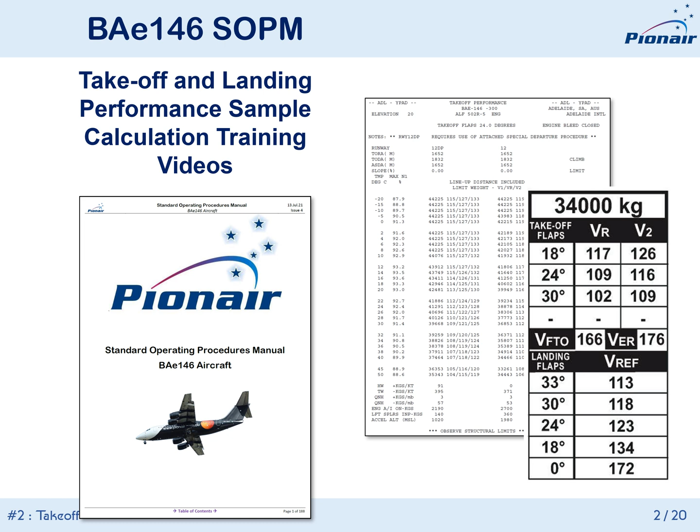By way of preparation, we suggest you review the published material so that you're at least familiar with the process. While some of the procedure relies on documents you're familiar with, such as runway analysis charts and speed cards, the new engine thrust tables card is a new document that will find its way onto our flight decks, along with a completely revised takeoff and landing data card format that we'll see when the new SOPM goes live.

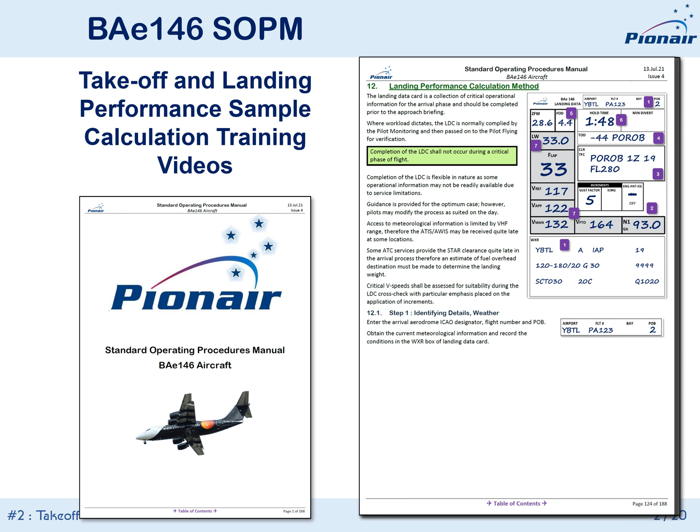Meanwhile, the process for calculating the takeoff data and the landing data is also comprehensively covered in the SOPM. Your best training experience is if you work alongside these videos, developing your own copy of the solution you see developing on the screen in front of you.

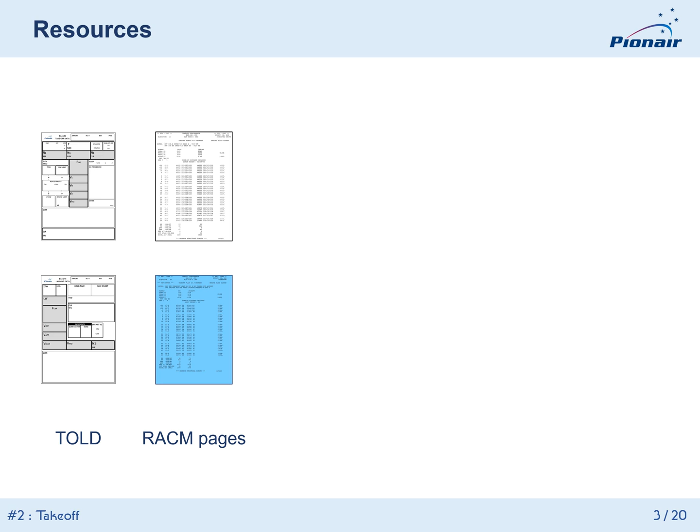To do this, you're going to need one of the new format takeoff and landing data cards, access to the Runway Analysis Chart Manual, or RACM as we'll be calling it from here on in, the new engine thrust table card, a set of 146 speed cards, and also from the front of the RACM, the list of airports and noise abatement profiles. All of this material is accessible electronically inside Comply 365.

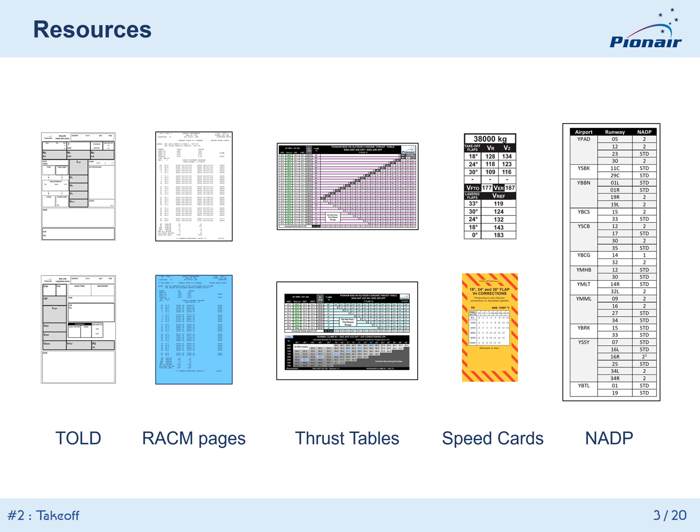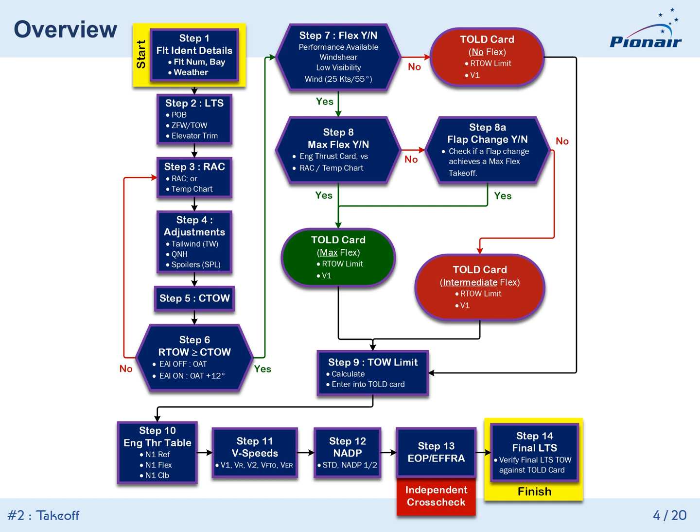Like anything colored purple in the SOPM, or in this case, purple edged boxes, if you click on the purple, your PDF reader will jump to that section of the SOPM and explain or provide a detail of what you've clicked on. At that point, your PDF reader will have a back button, which can then be used to take you back to where you last jumped from, which in this example would be this diagram in the SOPM. All right, let's move on to the example scenario.

Our second example is a departure from runway 29 centre in Bankstown, where the temperature is 8 degrees, the runway is wet, and it's raining. Pretty much screams engine anti-ice, doesn't it? The QNH is low, which is also not helping, and the takeoff weight is just under 35 tonnes. Also, we're in a 200 series aircraft. Let's go into it, shall we?

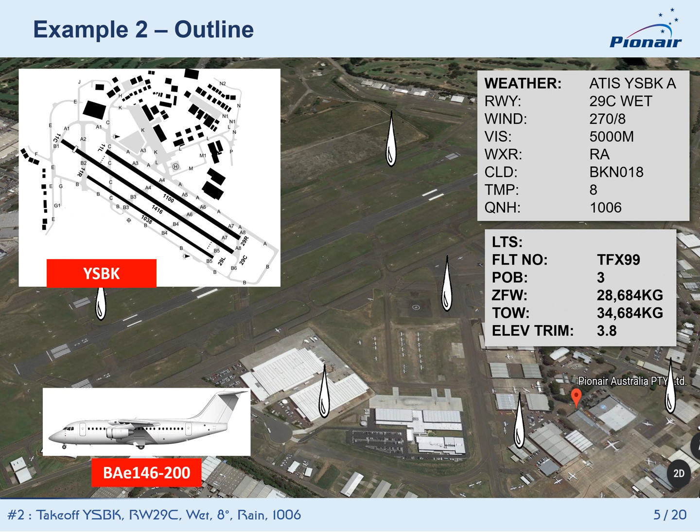Step 1 is the flight identifying details and the weather. So first of all, let's head to the top of the card with the airport and the flight number. If we had a bay, we'd stick that in there too. Moving on, let's put the pertinent weather from the ATIS into the weather box on the card. Based on the ATIS, we'll stick the runway in as 29 centre full length.

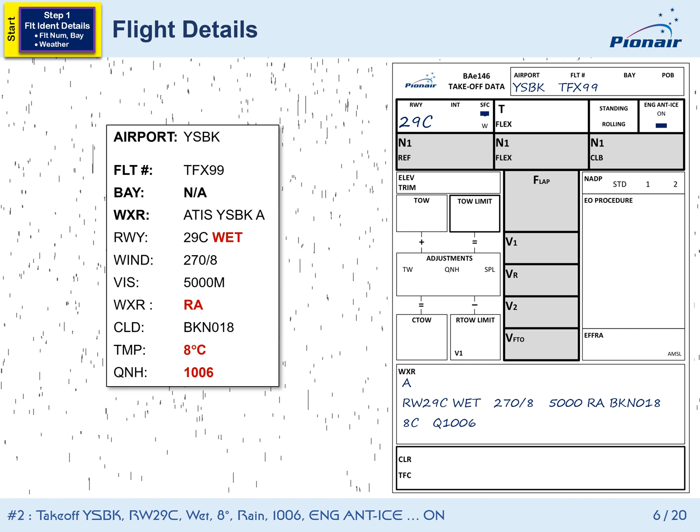We can also indicate that the runway is wet, which has been done here by crossing out dry, but of course you can use the method to circle wet if you want, just keep it consistent through the card. And at this point, we need to accept the inevitability of engine anti-ice on. Okay, so with step 1 complete, it's time to move on to step 2. Now we have a load and trim sheet.

The load and trim sheet comes with confirmation of the POB, so we can enter that in the identifying box at the top. Now we can take the takeoff weight from the LTS, round it up to the next 100 kilos, and enter that into the TOW box. We'll also take this opportunity to grab the zero fuel weight from the LTS and record it on the landing card for later, once again rounding up to the next 100 kilos.

Finally, the elevator trim can also be entered into the elevator trim box. Note that if we're in a -300, we just enter the final trim setting that we'll be checking with the before takeoff checklist, and we don't enter any indication of flap trim compensation that we would initially set during pre-flight. We'll keep the card simple. With step 2 complete, we're moving on to step 3, the RACM.

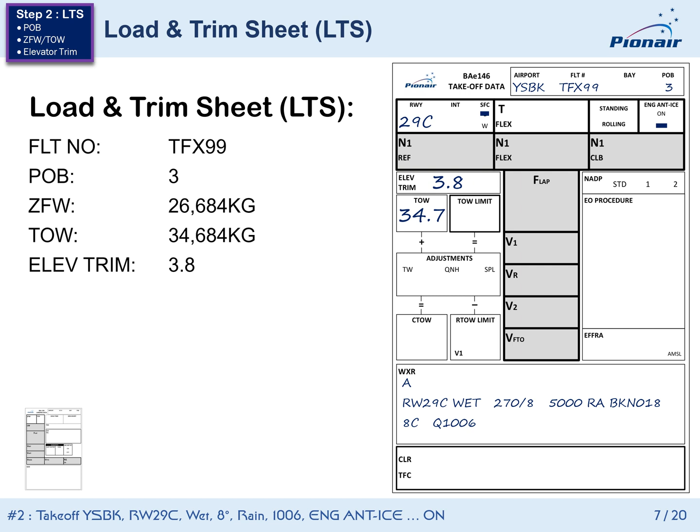Step 3 is the RACM. The first challenge is making sure we have the correct page. We need the correct book for the series of aircraft, remembering we're in a 200 today. We then need to find the airport and the runway, at which point we might need to go back and check there isn't a NOTAM watch chart that we should have gone to instead. But continuing on, the most obvious thing here is the light blue page, because we're operating off a wet runway, also indicated by the wet notation towards the top left-hand corner.

Meanwhile, we're in Bankstown, so the runway is shorter, and a wet runway is never good for stopping in an aeroplane without reverse thrust, so we're looking at flap 24 for our takeoff, while wondering in the back of our minds as to whether today is the day we use flap 30. The last factor to consider is whether we can use a straight-out engine departure and make the pilot flying's day, or should we be opting for a special departure procedure in order to optimize performance.

In this case, we're going for full-length runway 29 centre, no intersections, straight out on a wet chart, and no other aircraft taxiing in our way. Having chosen our RACM chart, we'll move on to step 4, looking at the weight adjustments.

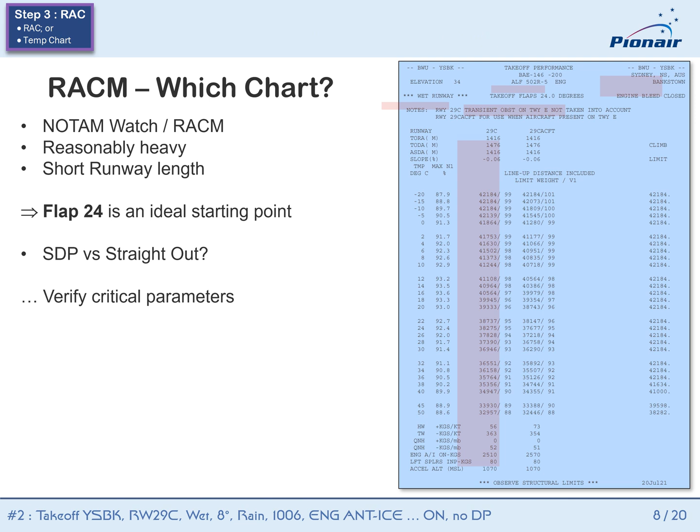Step 4 is calculating the performance adjustments we need to make for any tailwind, low QNH, or dispatch with defective lift spoilers. Don't forget that we never use the engine anti-ice adjustment in the RTOW manuals, as these are not valid when considering a flex calculation. Instead, we use the 12-degree method, which we'll get into later.

In this case, the only adjustment we need to consider is the low QNH. So let's indicate that on the card, in this case by crossing out tailwind and spoiler indications. So, onto the low QNH. With a correction factor of 52 kilos per millibar and 7 millibars to correct for, we end up with a 364 kilo adjustment, which we'll round up to 400.

As a weight penalty, we write that as a positive number because we're going to add it to our planned takeoff weight to produce a CTOW, which makes it easier to compare with the RTOW manual limit weights in step 6 and step 8. Let's write 0.4 in the adjustments box.

That's it. Remember that if you were really trying to optimize performance, not so much trying to get the best flex today, but trying to get the most payload off the runway in quite limiting conditions, you could use the headwind to account for better performance. We're done with step 4, on to step 5, where we calculate the CTOW using our new adjustment number.

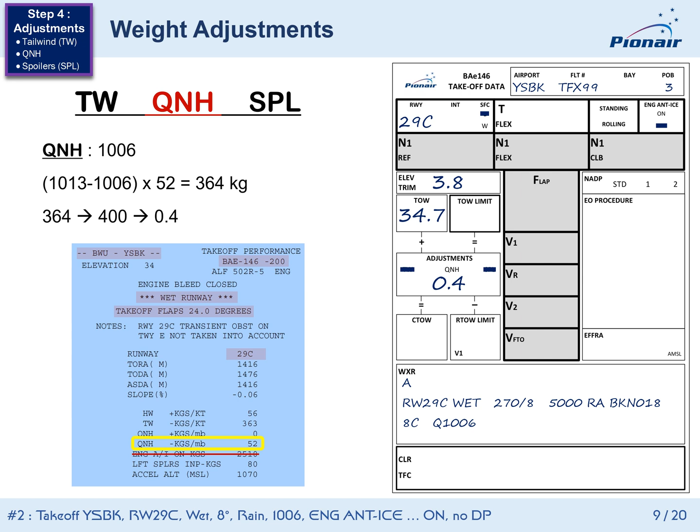Step 5 is the corrected takeoff weight, or CTOW. Once again, straight from the card, it's a simple addition to take the takeoff weight and add the adjustment. 34.7 tonnes and 400 kilos gives us a CTOW of 35.1, which we write on the card. And that's it for step 5. Let's move on to step 6.

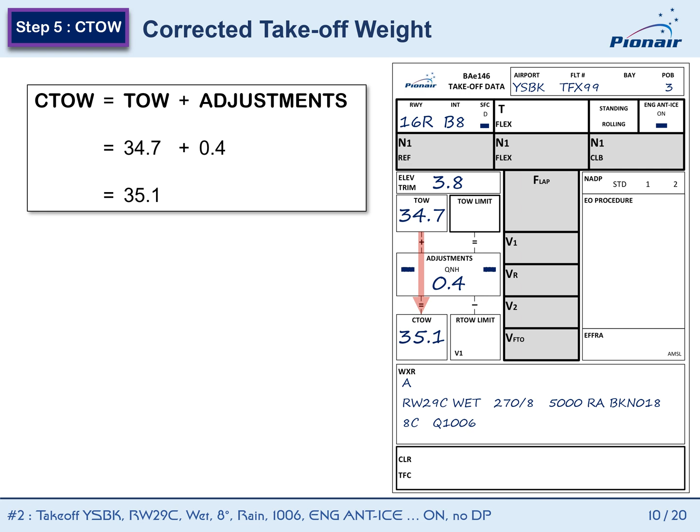Okay, step 6 is where we get busy. We are asked to check if the RTOW manual limit weight is greater or equal to the corrected takeoff weight we previously calculated. What we're actually asking is, can we take off under these conditions using full reference thrust? The first thing we need to do is actually determine what is the limiting RTOW from the manual.

Remember that in this case, we are engine anti-ice on, and we are not using the manual adjustment. So we need to use the FCOM 12-degree method. So in this case, we don't go into the chart at the ambient temperature of 8 degrees. Instead, we add 12 and we head in at 20 degrees. From 20 degrees, we head across to the right to our selected runway intersection column and look at the runway limit weight. In this case, it's 39,333 kilos.

As always, we need to continue across to the right to the climb limit weight, again at our augmented temperature of 20 degrees. Today, it's 42,184 kilos. As we complete our little table here, we can see that the RTOW limit is indeed greater than the corrected takeoff weight by just over 4 tonnes.

The upshot of all this is that we can actually take off today if we need to with full reference thrust. On the other hand, if we can't take off today using reference thrust, we need to go back to step 3 and reconsider some of the fundamental conditions. Can we get a longer or different runway, a different flap setting? Do we need to offload?

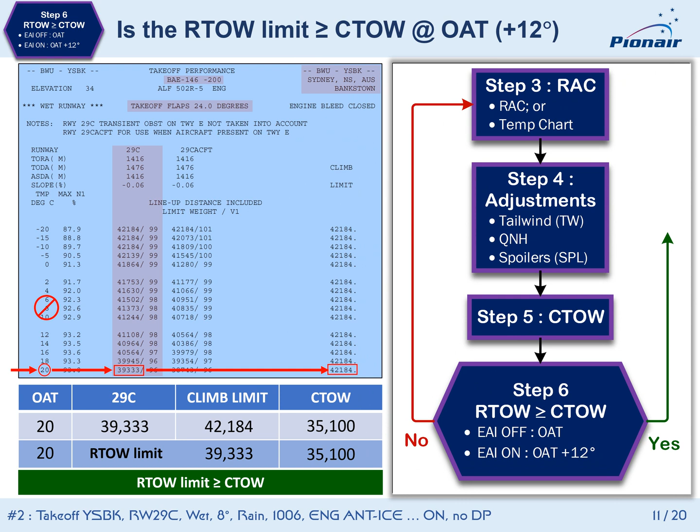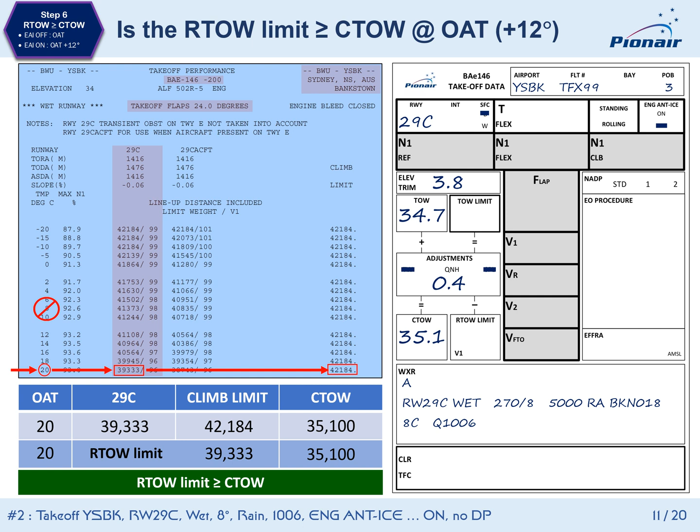Right, time to move on to step 7 and work out if we can flex today. With a CTOW of just over 35 tonnes and an RTOW limit at full thrust of over 39 tonnes, it's looking good so far. Before we get into the nitty-gritty of flex calculations, it's important to stop and ask yourself if you can flex today. There are a few operational considerations here.

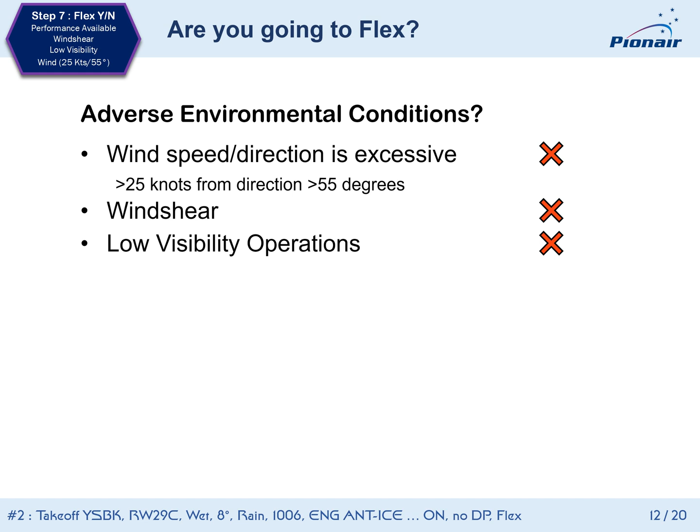Firstly, if we have a wind speed in excess of 25 knots from a direction off the runway greater than 55 degrees, the FCOM says don't flex. If we have reported or otherwise probable wind shear, don't flex, and potentially don't take off. Finally, if we're conducting low visibility operations, once again the FCOM says don't flex.

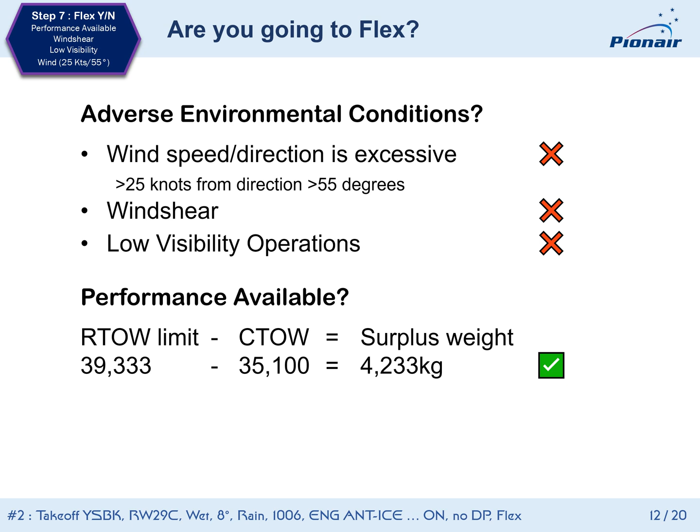Having decided that flex is operationally acceptable, now we need to check the performance. As indicated in the last slide, your potential to flex is in the margin between your CTOW and your most limiting RTOW. In this case, we have 4.2 tonnes of performance to play with, so let's move on and calculate the flex.

So having concluded from the previous slide that we are going to flex, now let's see if we can jump straight to the finish line and use max flex. For most takeoffs, there's a flexible thrust range between the lowest flex temperature, based on the ambient temperature and the engine flat rating, and the maximum flex temperature that gives us our lowest N1 flex we're allowed to use, which in this case, with engine anti-ice on, is 87%.

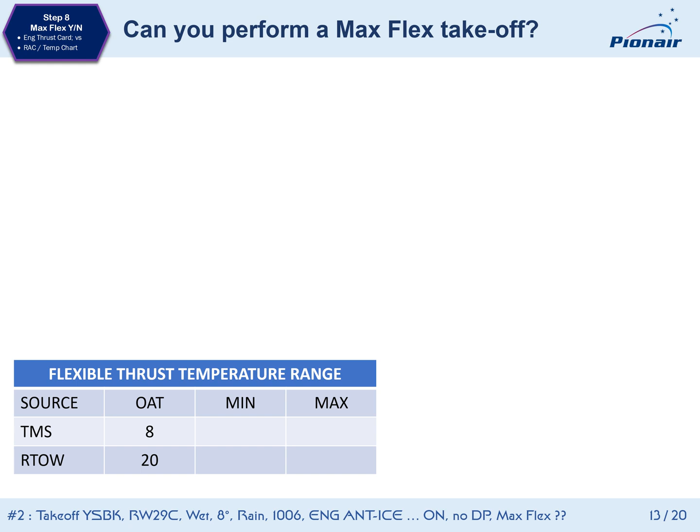How do we work out that range? The engine thrust table. This table is designed to make it straightforward to calculate your theoretical minimum and maximum flex temperatures based on outside air temperature and your engine anti-ice status. Today we're looking at the blue card for engine anti-ice on. Unlike the RTOW manual, we go in here at our actual ambient temperature. That's because this table is designed on the assumption that engine anti-ice is on, so we do not need to make a temperature correction.

Now we'll go to the right, in this case to the first valid flex temperature we can actually use, the lowest permitted T-flex. This is the beginning of our range. Here we'll continue all the way to the end to find our theoretical maximum temperature, which in this case is 26 degrees. Once again, it's theoretical because while 26 degrees is a valid flex temperature, we don't yet know that it will generate enough thrust to satisfy the performance requirement. But for now, it gives us our range. To work on the performance part of this problem, we return to the RTOW manual.

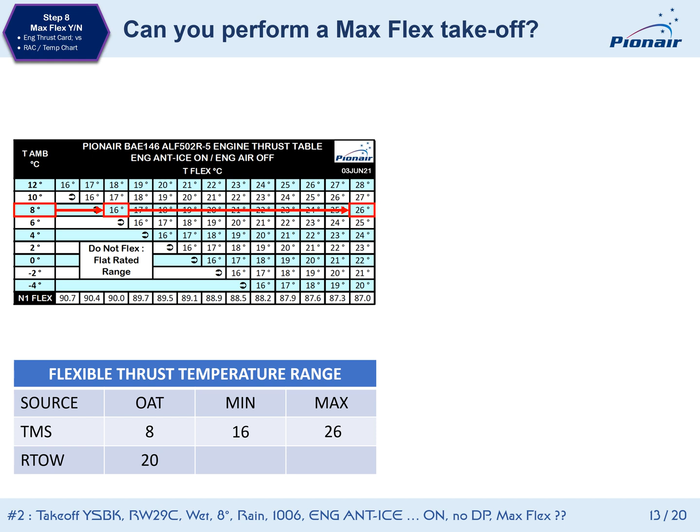Because we are engine anti-ice on, we need to add 12 degrees to those minimum and maximum flex temperatures when we head into the RTOW manual. This is an important point. When we're dealing with the engine thrust table, we use actual temperatures, we get actual temperatures because the card itself is designed around the use or non-use of engine anti-ice. But when we head into the RTOW manual chart, if we're engine anti-ice on, we have to add 12 degrees. In this case, our flexible range of 16 to 26 degrees from the engine thrust table becomes 28 to 38 for the RTOW manual chart. And so using 26 plus 12 equals a 38 degree max flex temperature, let's see if we can use maximum flex and get off our runway.

So starting at our 38 degree line, we head across to the right and once again look at the two limiting numbers, the runway RTOW limit and the climb limit. We can see that at 38 degrees of flex, our most limiting weight of 35,356 is greater than our CTOW of 35.1 tonnes. So the answer is yes, we can use maximum flex. If we weren't able to use maximum flex, our process suggests looking at a different flap setting or some other change that would allow us to use maximum flex. We'll have a look at this case in another example. For now, we are going to use max flex for takeoff, so let's finish off step 8.

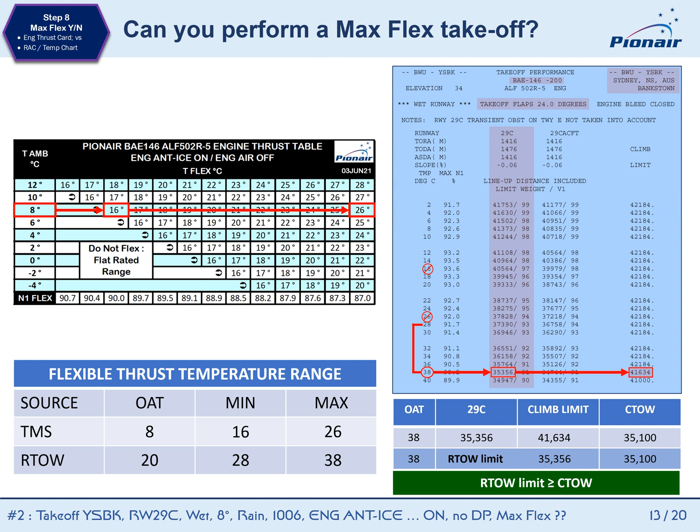And continuing on with step 8, we've established that we can use the maximum flex temperature from the engine thrust table today. So let's go ahead and record the details of that performance on the card. In this case, we'll round the RTOW limit from the RTOW manual down to 35.3 and write it into the RTOW limit box. And we also want to make a note of the limiting V1 from the RTOW limit performance in case this limits us against the speed card V1 later on. In this case, maximum V1 is 91 knots, not unusually low for a wet V1. We're done with the RTOW manual now. Let's move on to step 9.

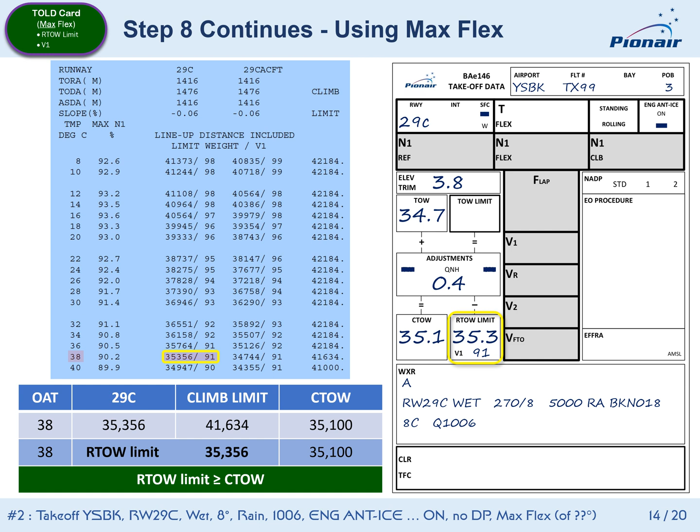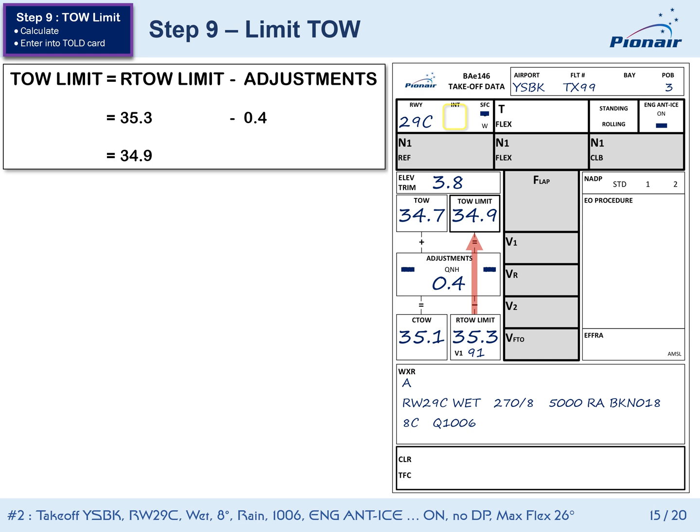All right, step 9 calculates our TOW limit for the card. That is, with the flex that we've decided to use, in this case max flex, what is the maximum takeoff weight we can lift today? We do this by taking our RTOW limit and subtracting from it the adjustments we calculated in step 4, which was for the low QNH. So continuing through the card, if there was some doubt about the intersection previously, perhaps we were not using full length from choice, then right now we would finally populate that intersection. In this case, we're always going to use as much runway as we can get our hands on, so it stays blank.

So we can now take our flex temperature, in this case we're using max flex, and write that in the T-flex box. Note that here we're taking the flex temperature we validated in the RTOW manual and subtracting 12 degrees because we're engine anti-ice on, and writing 26 on the card. Why? Because this temperature is going into the TMS, and the TMS knows all about engine anti-ice, or at least it does if we have it switched on and we set it up later on when we're taking off. Once again, the only place we do and must add 12 degrees is when we're entering the RTOW manual, and then you have to remember to take that 12 degrees off when you're pulling temperatures out of the RTOW manual to use in the real world. All of this based on being engine anti-ice on for departure.

And since we have ended up within 200 kilos of our performance limit, we are required to do a standing takeoff. So let's cross out the option of a rolling takeoff on the card. And finally, let's write takeoff flap in the card, nice and big. Time to move on to step 10, the thrust settings. For that, we're back to the engine thrust table card.

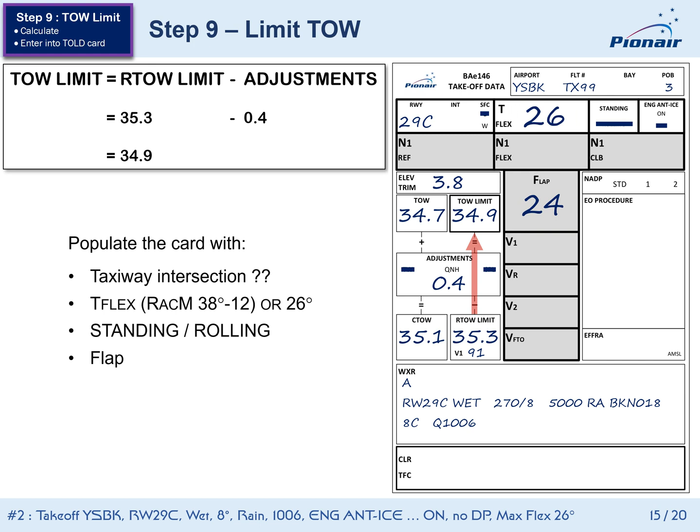And here we are in step 10 for the thrust settings. We need to calculate our flex thrust N1, our reference thrust N1, and our climb thrust N1. We're back in the engine thrust table once again, and this time the blue card for engine anti-ice on.

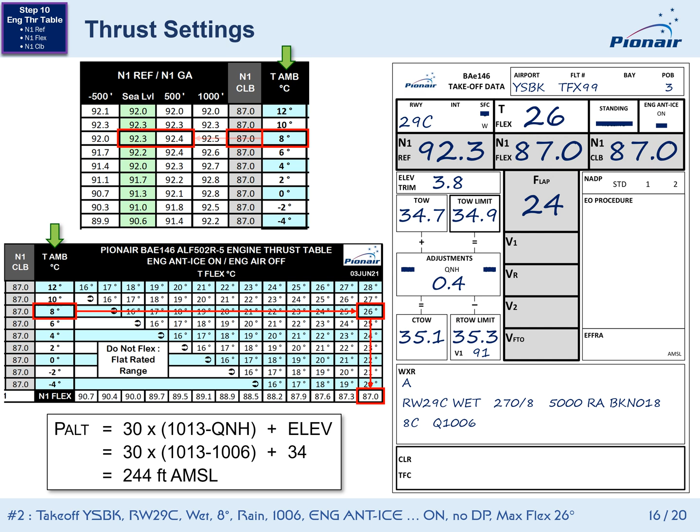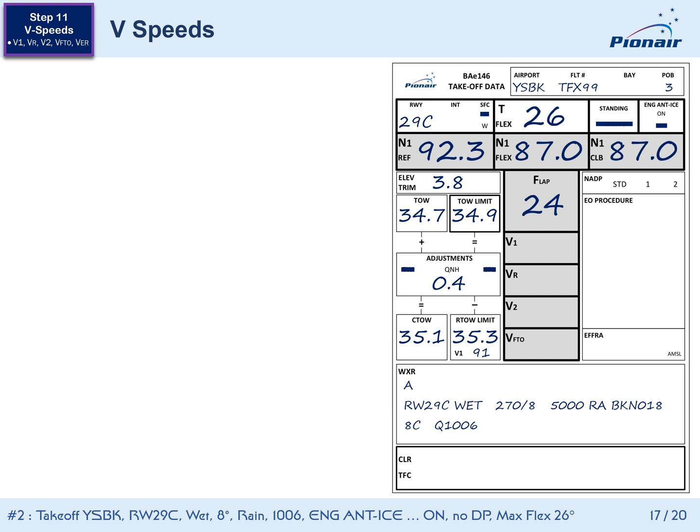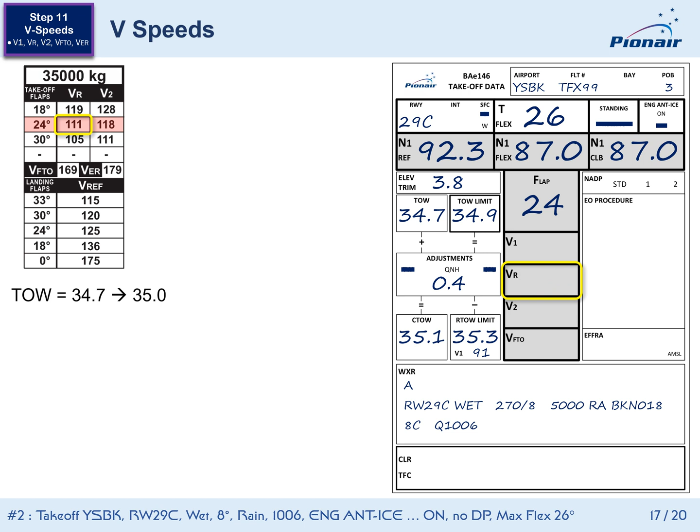So much for step 10. Let's move on to the V-speeds in step 11. So the V-speeds come mostly from the speed cards with a couple of caveats. First, we'll round up the takeoff weight to 35 tonnes to select the correct card. So from the 35 tonne card, flap 24 takeoff, the VR and the basic V1 is 111 knots. Now we need to correct this for temperature and pressure.

So our final TOLD card VR will be equal to the speed card basic VR with a correction from the VR correction table. In this case, 8 degrees of ambient temperature and sea level comes with a correction of -1 knot. So the VR for the TOLD card is 110. Next, we occasionally need to consider a V2 correction, but since it's only required in the 200 series for takeoff weights of 28 tonnes or less, it's not applicable today, and the speed card V2 of 118 knots can go straight onto the TOLD card.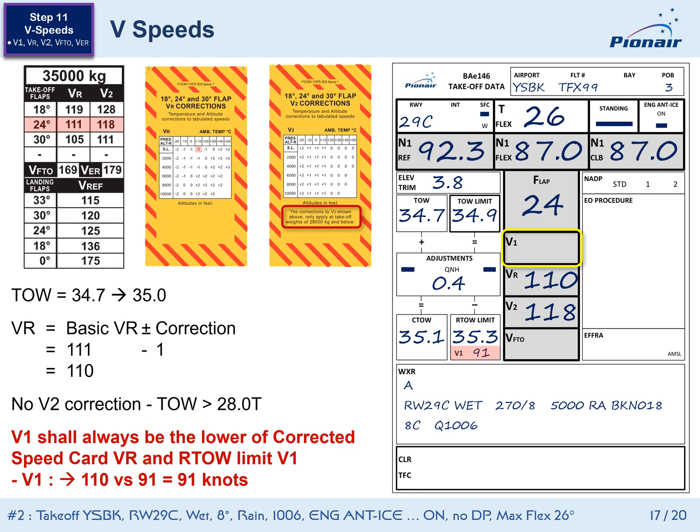Moving on, our V1 must always be the lower of the RTOW manual limit V1, which we made a note of earlier, and the corrected speed card VR. In this case, the lower of the two speeds is the wet 91 knots. Time to fill in the V1 on the TOLD card.

We're almost there. We can grab the VFTO of 169 from the speed card and write it on the TOLD card. And that's pretty much the end of the speeds for the TOLD card. And just a reminder that while we don't write the VER speed on the TOLD card, we will be bugging it from the speed card onto the ASI where it's always VFTO plus 10 knots. Let's head towards the finish line of step 12, noise abatement.

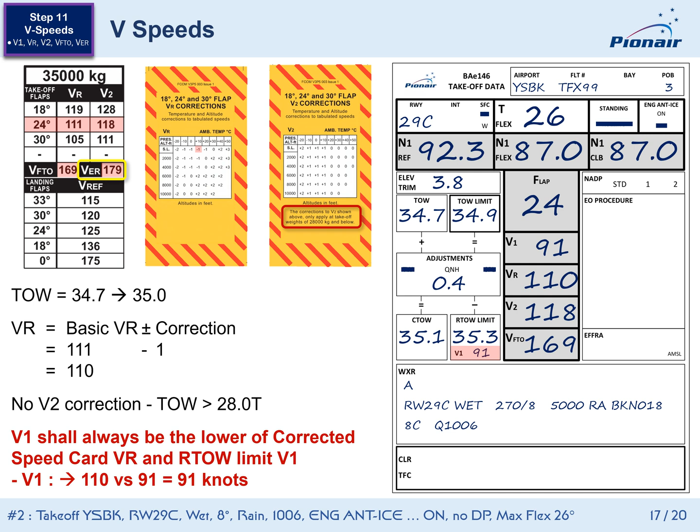While the source document for noise abatement is our Jepp charts, Pionair published a quick reference noise abatement list at the beginning of the RTOW manual. This list conforms to any specific noise abatement departure procedure dictated by the airport authority, as well as Pionair's SOP preference for NADP2 when noise abatement is required but no specific procedure is specified. As always, indicate on the card the requirement. That's it for step 12, on to lucky 13.

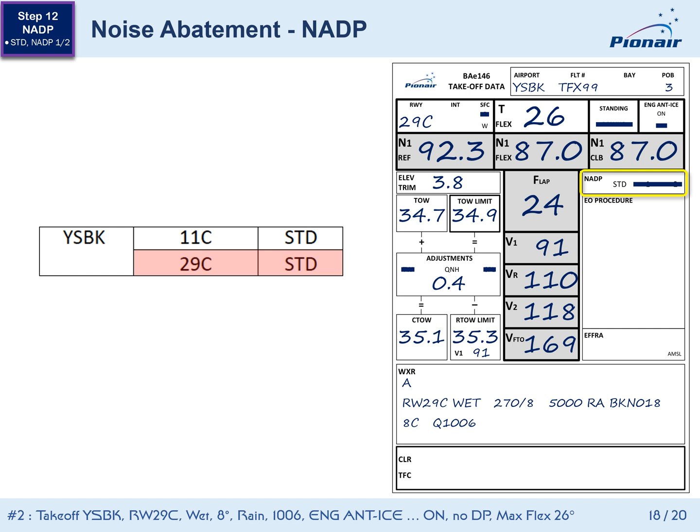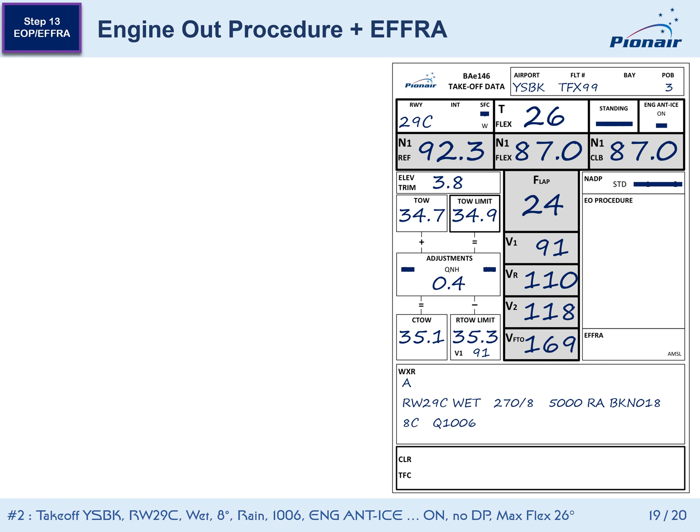Our final step is to record onto the TOLD card the engine out procedure and the engine failure flap retraction altitude, or EFFRA. Remember, of course, that if we have DP in the runway intersection name, then there's a special departure procedure to go looking for in the RTOW manual. But in this case, it's a straight out departure, which means straight ahead to 20 miles, establish a left-hand 5-mile holding pattern.

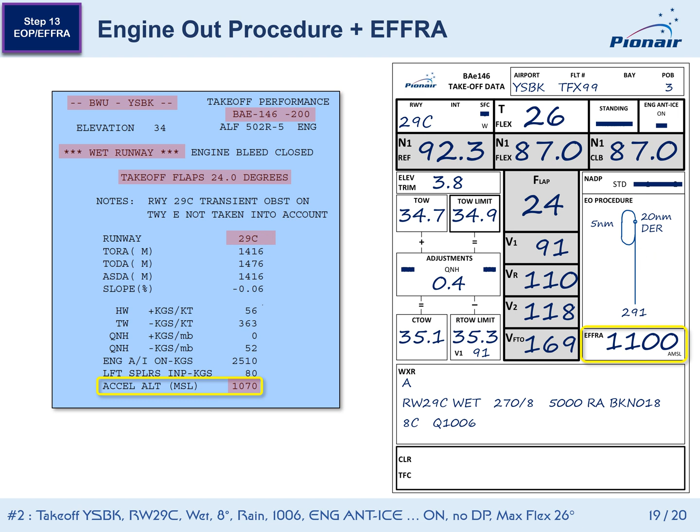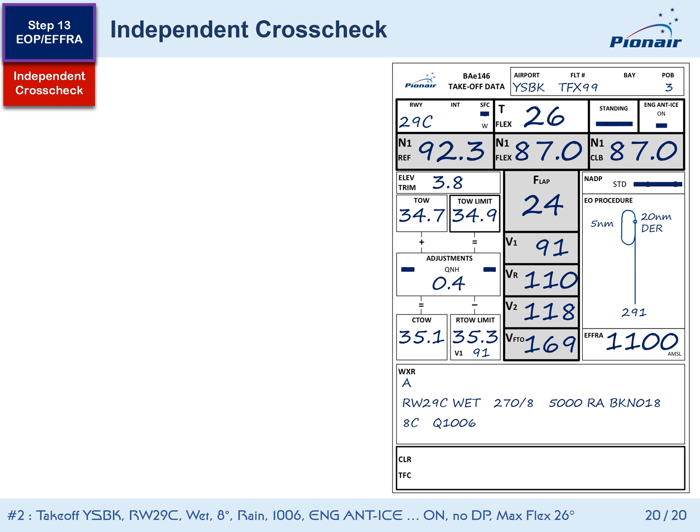And finally, our minimum engine failure flap retraction altitude is published in the RTOW manual here as 1070. We'll round this up to 1100 for altimeter bugging purposes and record it on the card. With the card complete, it's time to hand it over to the other pilot for an independent cross-check. While this procedure is covered in the SOPM, the following points are worth noting.

Cross-checking is a skill that, first of all, requires the knowledge and understanding of how the card was completed in the first place. You can't cross-check a card if you don't know how to prepare one yourself. Cross-checking requires you to consciously avoid prejudiced information. This includes looking at the ATIS yourself, the load and trim sheet, the RTOW manual, the thrust card, and the speed cards. In all cases, finding the correct page yourself rather than accepting a previously selected page by the other pilot.

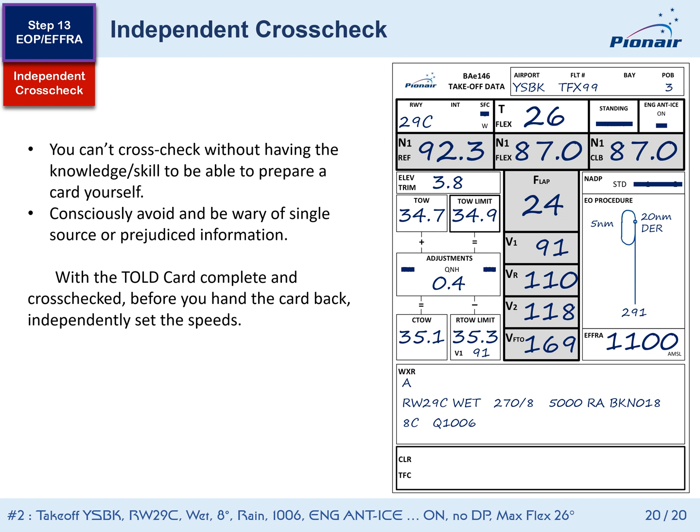With the TOLD card complete and cross-checked, before you hand the card back to the other pilot, independently set your speeds. When the card is returned to the other pilot, he or she should also independently set their speeds, at which point the FMS setup, N1 bugs and airspeed bugs cross-check can begin. That's the end of this example.